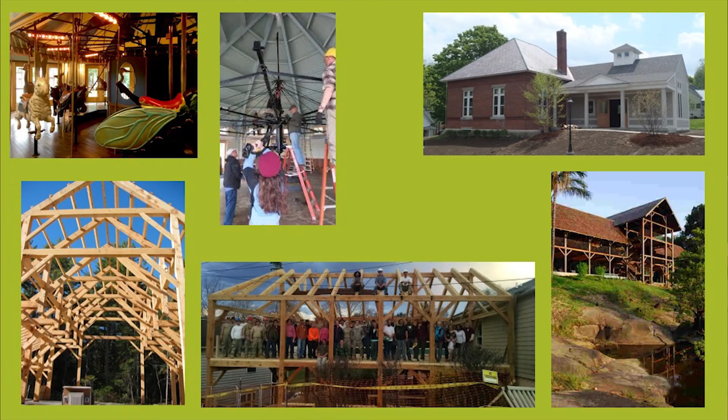This is actually my home that I don't live in anymore but still own, the first house I built in New Hampshire. And you could fit this house just in the living room of this house. So it's a wide range. Johannes had asked me about commercial structures as well, and I have done some over the years, mostly for institutions, a library addition, which I'll just mention briefly later, a carousel, which when they finally built, it's very hard to see, this timber framing is actually all steel, but they did use my design, but then built it in steel. It's still a very lovely building.

Projects with the Timber Framers Guild. This is one in Suriname that was a partnership with a local group. And Matthias, you were asking about the Virginia Military Institute. This was one of the projects we did for an addition to a women's shelter in Virginia.

So we do have quite a history in North America of timber framing, and this is right in the town where I'm living right now, Sandown Meeting House, from 1774, and here are some plans for something you can buy today, and a lot of people are very much interested in this kind of a style still.

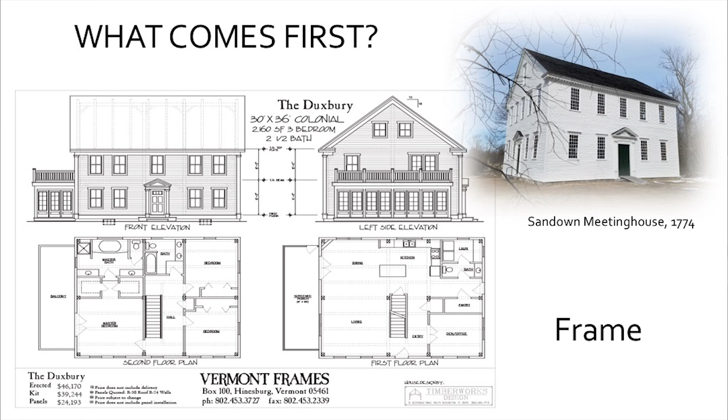So this is one timber framing tradition, and I guess in this style, it's very much set what the shape of the building will be, what the timber frame will be. In some ways, you start with that timber frame and put rooms in it. So the form is very set, and certainly this is a way that people have been living for a long time. When I started working with timber framers in design, this is most of how I was approached.

I am going to build a colonial. Can you show me where the rooms go? You know, so the frame is set and then put the rooms inside it. And I still do that. That's one approach to design. So here is, just took this out of a modern plan book off the internet. So you can pick that ready-made today, same kind of concept and frame you might see today.

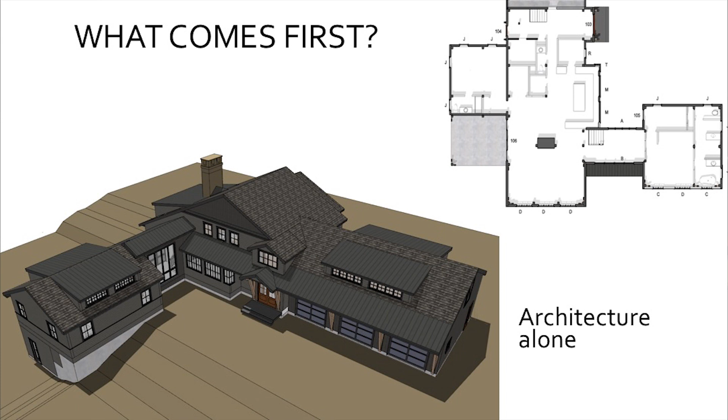Then, and I'm sure some of you get this, the house is completely designed, possibly very complicated. Can you put a timber frame in that, please? Has anyone been in that situation? And sometimes, oh, hi. Sometimes that works well and sometimes not so well. I have this one as an example. The design was very set, and then I was asked, can you put the frame in? Let's see if I have a view of this.

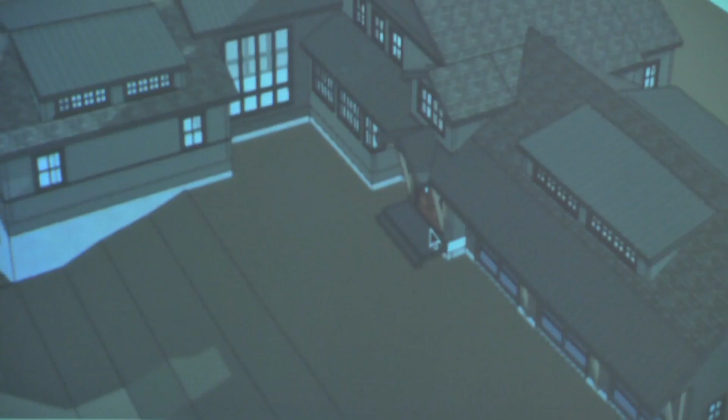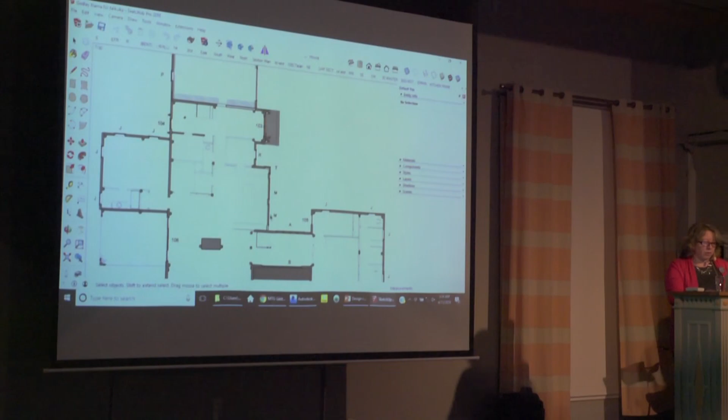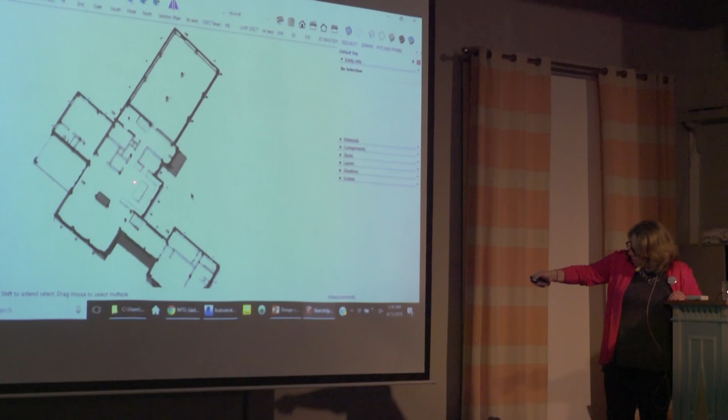So I did have a SketchUp drawing from the architect, and then I kind of redrew it. It was just a concept, so I redrew it, but I did take that and put the timber frame in. But we had a few spots, for instance, on this first floor, you can start to see the beginnings of a grid here with timbers going this way down here, and then another line of timbers, except we couldn't have a post right there or right there, or right there because there's a nice big door.

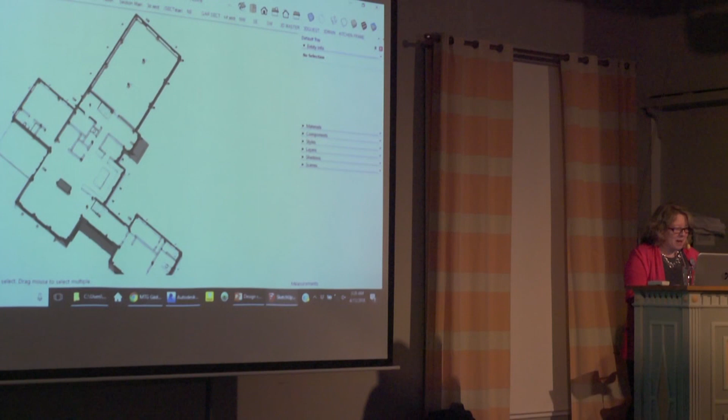So we design the frame and then we fix all the problems of... You're laughing because you've been in this same situation, right?

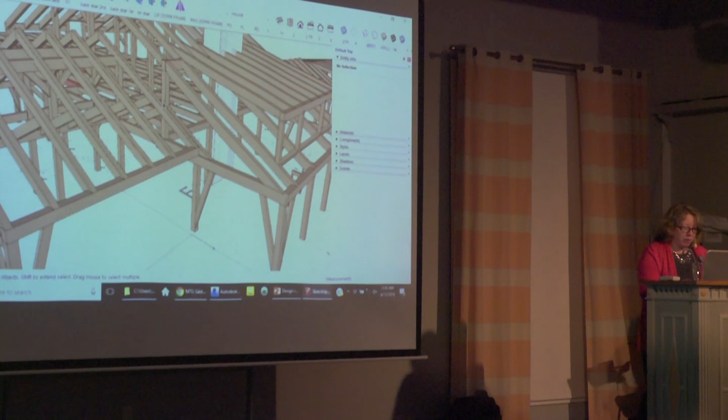So over here, we can't have a post coming down all the way here, so I create a truss up in the roof structure. A little hard to see there, but maybe you can see it right there. So we create this truss to stop this post. This is in an area where you might get 2 feet of snow on the roof. So I would rather design from the beginning to have all the loads go down to the floor, a much simpler concept. But these are the situations you find yourself in sometimes.

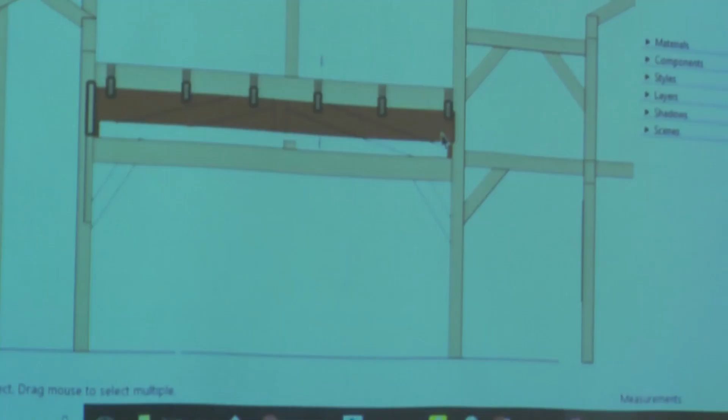Similar on the other side. Another post coming down with a lot more load and ended up putting in, we thought steel, then wood, a very large beam to take all the load of that so that the kitchen design stays proper. So I'm trying when I design to think about all things at the same time, which can get a little difficult, but as timber framers, you're always used to thinking in 3 dimensions in any case.

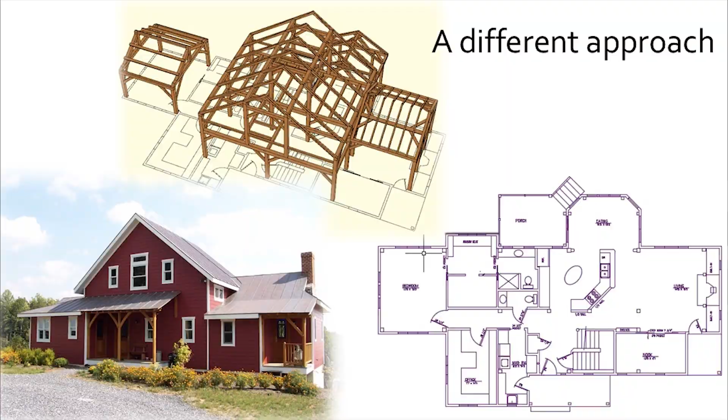So thinking about the floor plan, which most clients have the best understanding of, they can see this plan and the layout of where the rooms go, but always at the same time thinking how that is going to be in 3 dimensions. And to my own aesthetic, to end up with forms that are fairly simple, can be understood. When you walk up to the house, the main thing is happening in the middle, and other less important things are happening to the sides. And that's just how the plan is laid out too.

The main living space here, a smaller place to gather here and to eat here, a retreat for the parents, that's that frame there. And for this project, a lot of the pieces in between where you don't see the timber frame were just filled in with other kinds of structure. What I wanted to say about the plan, though, is going back to this kind of a plan.

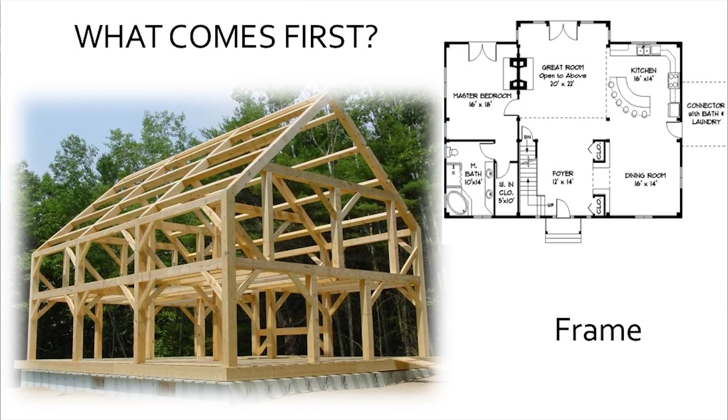This kind of a plan is very much a grid, or like a checkerboard or chessboard, 1 square, 1 square. So you make that grid and you say 1 square is your kitchen, 1 square your living room, or 2 squares, but everything goes by the grid and the squares. And what I've tried to develop is there's still a grid work, but it's more, I thank the gentleman to the side here, almost in the back, that's wearing a plaid shirt. I think it's the same in Swedish, right? Plaid, right?

And also right here, where you still have lines intersecting, but different spaces, because there's a different hierarchy of importance in the space, and where those things intersect then also become your main spaces. So I have a major line here, a minor line here of stairs, and a small little study or sleeping space. Similarly, major here for the sleeping space, and then a little minor in-between space for a closet, a resting area.

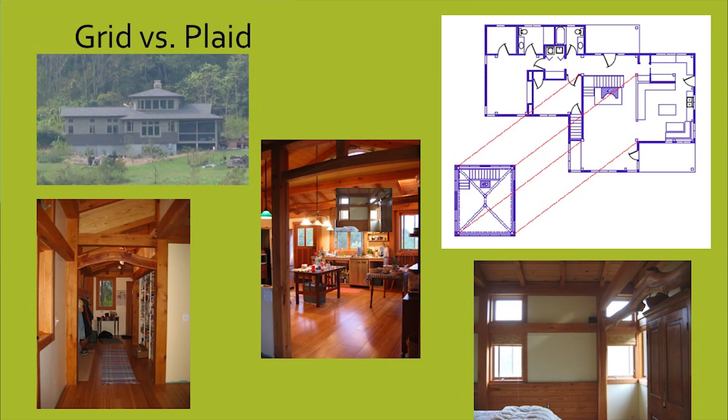So this idea of an interweaving or a plaid floor plan instead of a checkerboard floor plan. So there is another example where instead of a number of squares, you have a much smaller line here that is your access, your circulation between rooms, main space this way too, and another line going this way. That's not uncommon for architects, the way that a lot of architects would work, right? Creating these major and minor lines and paths.

But in timber framing, at least in North America, that was kind of a different approach, because there was, at least where I live in the northeast part of the United States, a long tradition of this more traditional square way of thinking. So just a project I did a number of years ago using this approach, and also trying to bring in a couple of spots the natural timbers, a little harder to see there, and in the bedroom here, to be a little bit of a reminder of the tree, of where the wood is coming from.

We were also talking in the car about timber braces, knee braces. These clients didn't really want to see the diagonal braces, and Rupert said, well, why are you doing a timber frame? But we came up with a different approach where all of the bracing is inside the wall, in an infill structure. And so we were able to avoid the diagonal braces, which they didn't want in the project.

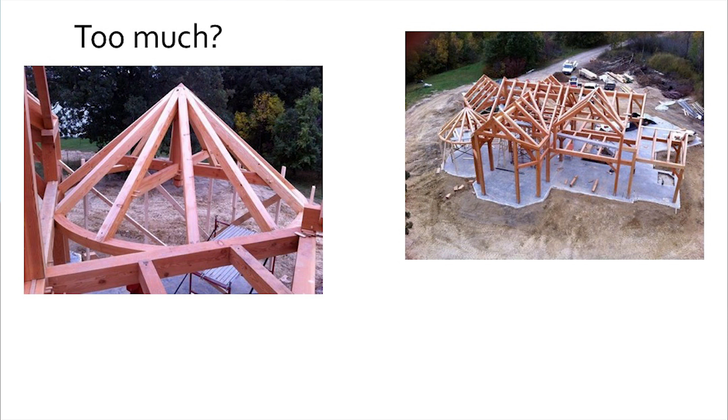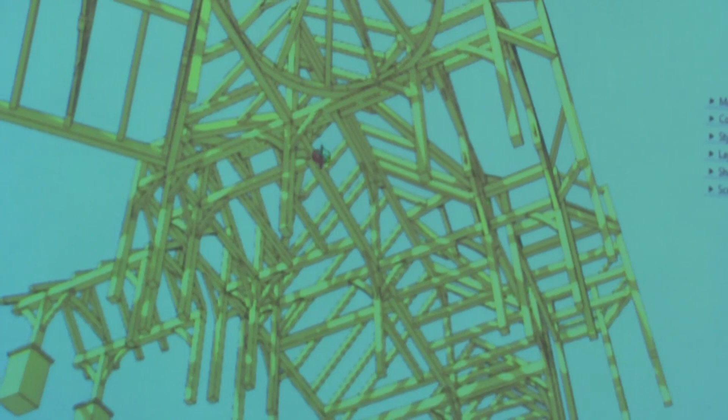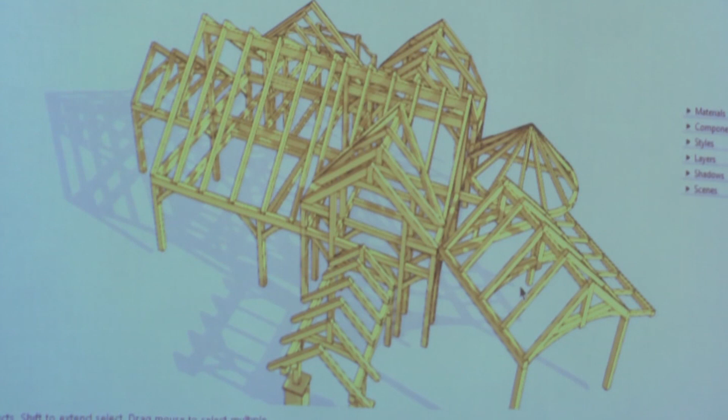I've done projects like this where every little space has its own roof, has its own special thing. And we get into a situation where the intersection, I think I have a better view of that. Again, the design was set, and then how do we put the timber frame in? I think in the end we worked it out so that everything kind of mixed, played well, but this was a design that was already designed. I don't know that I would have designed it this way, because to me, these frames almost seem like they're in a little bit of a battle. I'm not sure who won the war on that one.

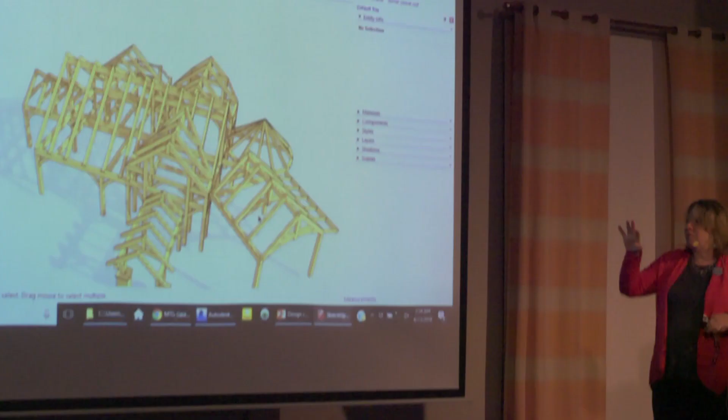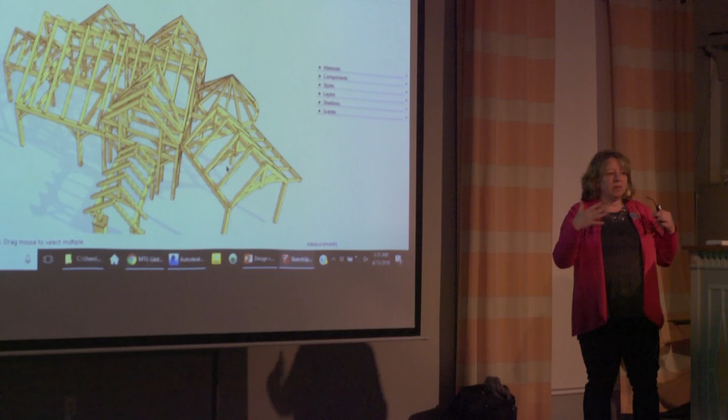But to me, I'm feeling a lack of harmony, even though each of the spaces probably has a very nice feel when you're in it. When you look at the total experience in the home, I think maybe too much of a clash, too much of an argument between these frames that are trying to get along.

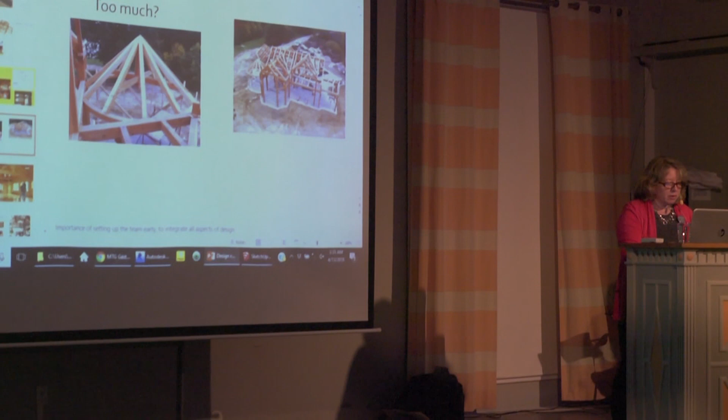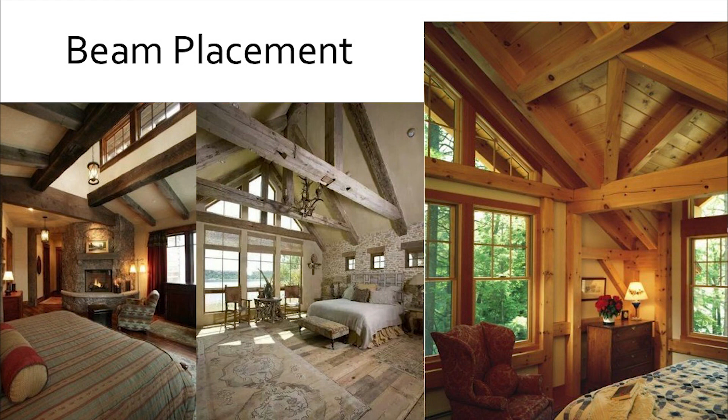So a couple of examples: this bed, I think it's centered nicely between these two very big, heavy trusses, but I would be a little uncomfortable laying in that bed, feeling like I was about to be sliced on either side. I did a project in years past, and the client wanted a hip roof to wrap in their bedroom, but it created a situation where there would be a diagonal beam directly across the bed, overhead. To me, that would be a very uncomfortable way to be sleeping.

I don't follow a lot of feng shui directly, but I think about those principles, and that to me was very bad for marital harmony, to have a beam directly across. Here's one. It's just to the side of the bed, and I thought this could be very nice. Very much smaller timber, of a height you could almost touch, so it's more friendly to you. It creates a very small little extra space there. This is a small room, but you almost feel like you have another little extra space in your room. This is an entirely different scale and has an entirely different effect.

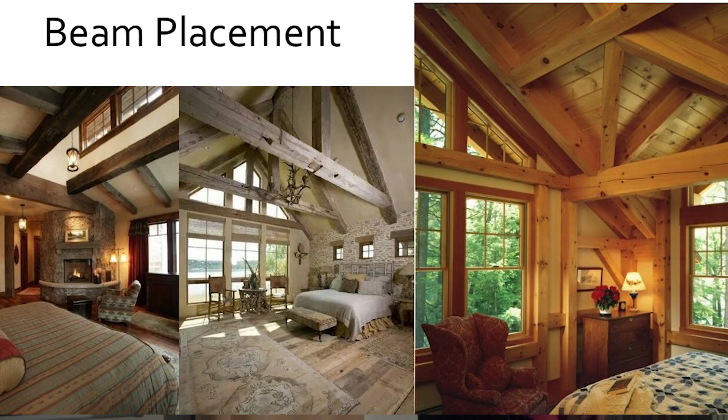This is another example where I like how the light is coming in, but maybe in the cross section drawing that looked better than in the room, where you can't really see the windows when you're laying in the bed. So that's why I showed some of the SketchUp drawings. I'm trying to model everything now in 3 dimensions. It can be a little deceiving about the size of a room, but it will show you what you can and can't see in a space.

So, just again about beam placement, I don't know that every room has to be symmetrical. It doesn't bother me that this is to one side, but the way the beam is placed makes it look like I can't tell whether this is supposed to hold up the beam or they're just fitting it in.

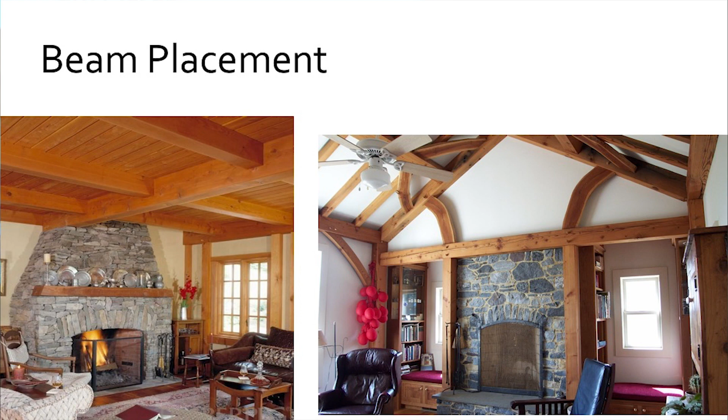Very heavy, and everything in the room kind of makes you feel weighted down, and again, you're sitting directly under this very heavy space. Just a little contrast, a lot of variation between larger pieces and then the smaller pieces.

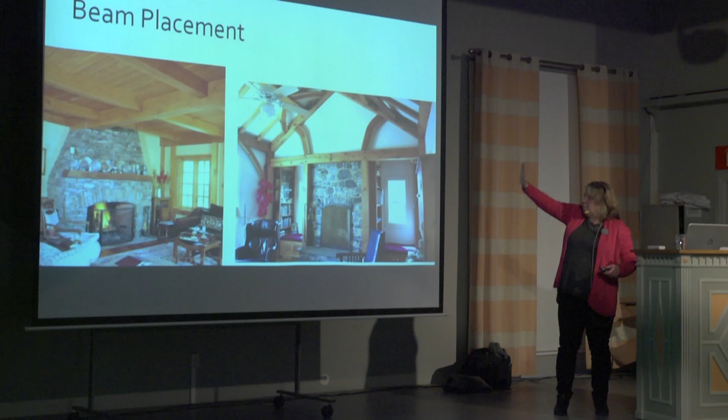And we also, in this project, because they wanted these extra window seats, we just brought the timber frame forward so you could see it, and then put that back, just extra framed part past the timber frame. So separation of spaces, again, this is a very typical condition, a design of timber frames, and how you would separate to put rooms within that space.

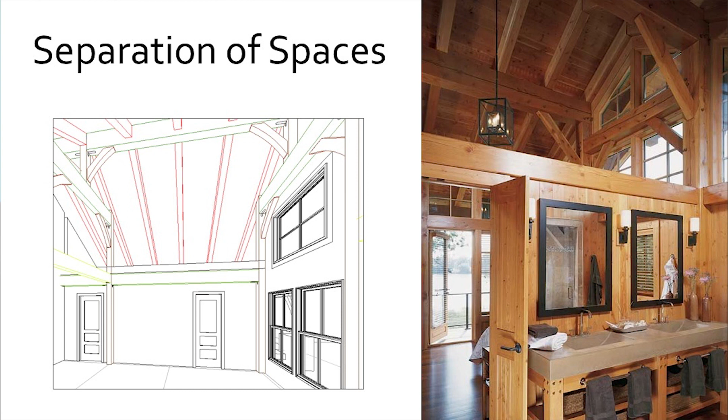This is a project I'm working on right now, and I've been experimenting with... here's the floor plan. We had a meeting live with the clients, but online for this one, and experimenting with showing right on the screen the spaces to see if they can understand. But the timber frame in this area, so large purlins coming across in the roof, all open to the roof, but how do you close off these spaces?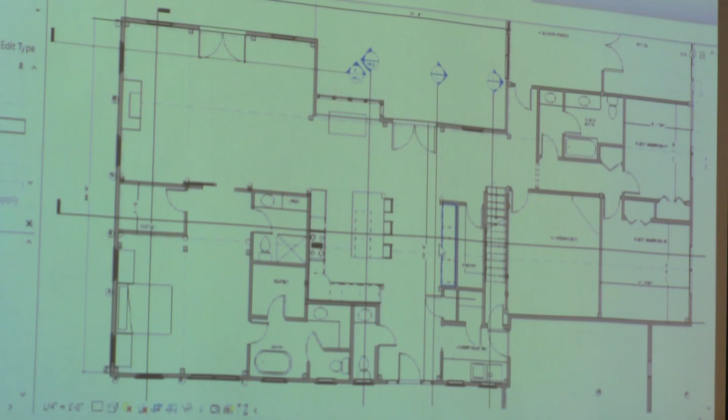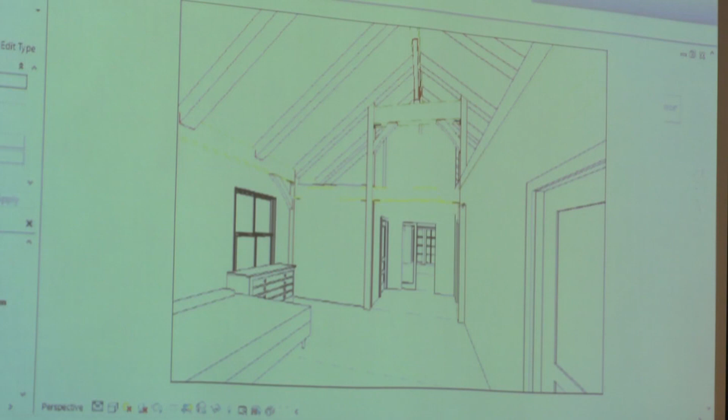In particular, everything follows the frame, but do the walls go all the way up to the roof, or do you stop at a certain point, kind of like in the previous slide? And so this is a very, very schematic stage. Are you able to see that from there? It's a little extra bright. So it's at a very schematic stage, but just to show, does this closet just come up to here?

And I actually wanted to just bring it all up. And again, the clients thought, well, the timber frame's so pretty, I want to see all of it. I think it's fine to me, but it kind of makes it look a little bit like this is a little phone booth, tucked in. So I would prefer to have that go all the way up, but we're still working on the design. And the same thing on this side, we have a bathroom, and do you want this space above?

So there we are looking towards it. There's the whole frame. Unless you have a ladder or a stair or some way to get up there, and some use for that, to my eye, it would be better just to cover it. And that also represents a lot of work in the timber framing, but I like that your eye can go past, but maybe it's, again, too much.

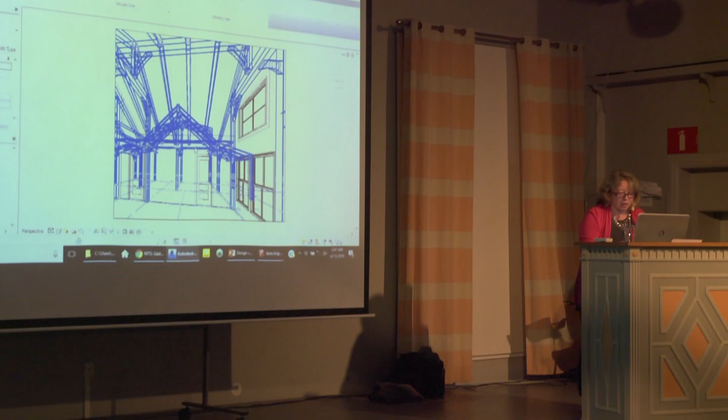It also does raise a good question, though, about placement of braces, where you place the walls, to one side of the beam or the other. If you have, in America, all by inches, 8-inch post, 6-inch beam, and it's all to the center, do you place the wall to the side of the post, to the side of the beam? There's no good answer, or in this case, actually, you can see the X-ray of the frame there. No braces, because we had a wall there. They just decided to remove the braces.

So here's a very similar condition where the wall stops, you see the timber frame past, but you can't really get to that space. It's just for your eye. I have a mixed feeling.

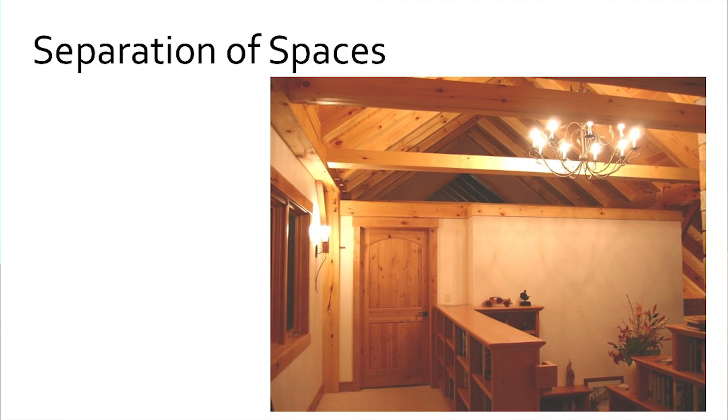This was another project, a similar kind of concept where you have the two main central purlins. We had a little office space, and this was kind of designed by the client. He came with a very developed design that he had produced himself, and he had this high dormer up here. So we decided in this case to make a little roof just for this room, so that from this room you could see up and towards that dormer. I think it worked out okay in the end.

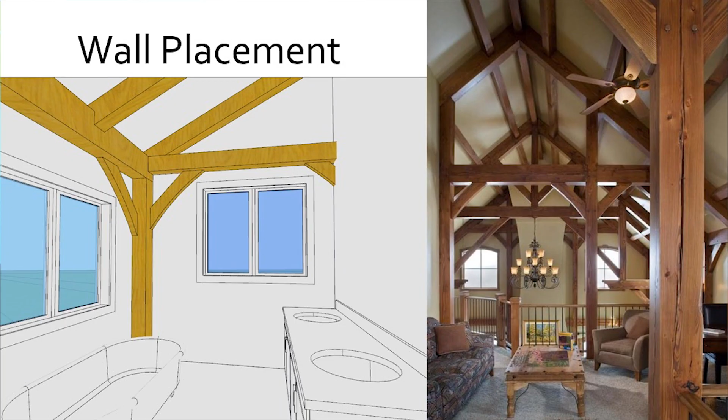Back to wall placement, here's an early study for this room. That to me is not good. That's the brace coming through from the other side. I don't mind a brace across a window, but that looks like I wasn't really paying attention. So when designing the frame, now I'm trying to have all of the architecture in place, even if it's very schematic like this. This tells enough. I don't need the detail, but it tells enough about a consideration that we might not have thought about.

Here's a good example of placing the wall by the post. In the floor plan, it probably looked very good, but here it looks very, very blank in relation to this side, and you can see that last purlin is just to one side of the wall, and maybe the answer is not in the timber frame.

Maybe this wall needs to have another level of detail or some wood cladding just to bring it more in harmony with the frame, but it looks very abrupt, like you had one thing happening and then all of a sudden something different there where that wall is. But to my thinking, that probably looked very proper in the floor plan, but when you see it in 3 dimensions, then maybe it didn't quite work out the way they thought.

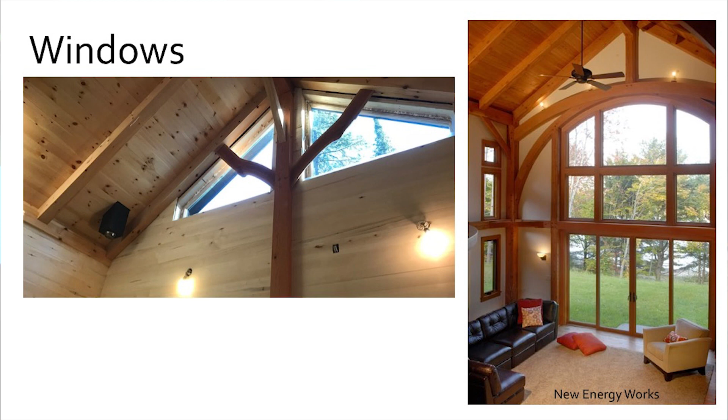I like the timbers across the windows. I think it's nice. This I thought also very nice harmony of the timber work with the windows, and you can see just very small here, the timbers going across the window trim.

To me, that brings to light that, at least in North America, most of the time, the enclosure is to the outside of the timber frame. You're seeing the whole timber frame. So if they're in a separate plane, they can be doing separate things. And I actually find it appealing when that looks well balanced, to have those two things working together, but they highlight the difference between the two.

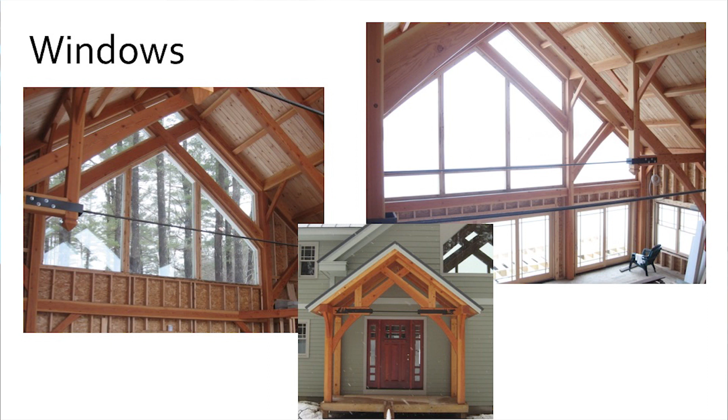And here's an example where actually the windows were designed to perfectly fit inside the timbers. That shape was a little bit of a theme. We even followed it onto the front porch there.

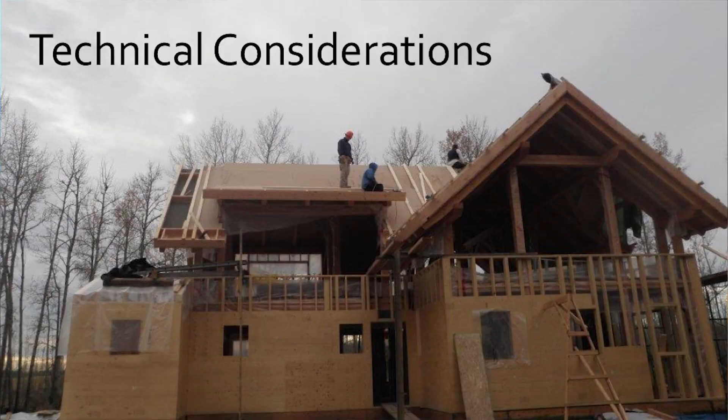So some technical considerations. There's a lot going on in this photograph. This project, they decided to do the enclosure wrap with conventional framing, and my understanding is that that's what most people are doing in Scandinavia. Is that correct? So both on the walls and then on the roof, you can start to see just on top boards, and then a layer of conventional framing, cellulose insulation. What might be very familiar to you.

I would say on the projects I work on, maybe 20% use this kind of enclosure, and a lot of times that's because it's easier for the people doing the work. They understand it. Maybe they're carpenters that are used to doing this kind of work, so it's very easy to tell the crew just to do it the regular way. But of course, if you have a whole structure inside, it's a bit redundant.

I'll talk about floor systems first, but on the walls, in North America, I would say what's most common are the structural insulated panels. And is everyone familiar with the SIPs, or the structural insulated panels? It's like a sandwich. So some kind of plywood or some sort of wood structural panel on the outside, a thick core of foam, different kinds of foam available, and then on the inside the same wood.

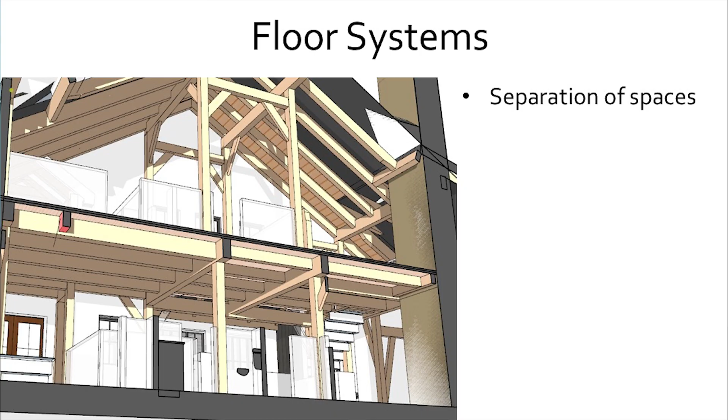So for floors, between, let's say, the first floor and the second floor, what does a floor need to do? For one, separate the space, so you don't fall to the first floor when you're on the second floor. It's inconvenient. So the very most basic version of that would be just boards right on top of the timbers. I do this on, I would say, about 1/3 of the projects I work on. Just put the floorboards down and we're done. It's the least expensive way to do it.

In this project, they actually have boards and then another product to take care of sound, just a little bit to have a sound barrier, and then a more finished floor. So it's 3 layers, but still no airspace, and all together maybe about 5 centimeters, and not very good to separate sound, not good at all to separate the vibration sound.

You hear every footstep. And in the case where you just do the boards, over time, it's kind of like it's always snowing in the house, because everything from upstairs is slowly coming downstairs, and I always think of it going into my soup on the stove. So I like to have a little bit more separation.

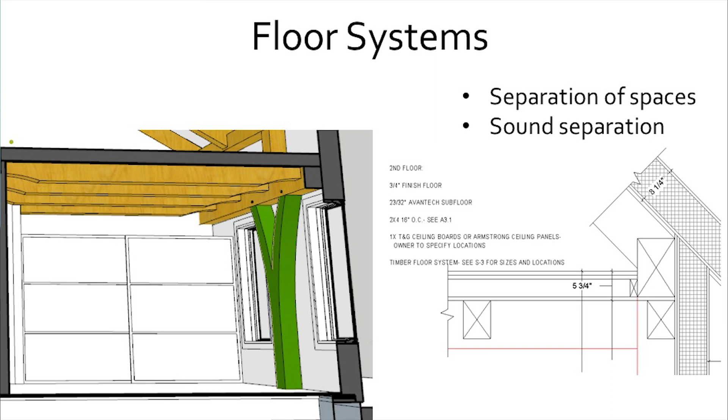So in the US, a 2x4, so about 3.5 inches, or a little less than 10 centimeters. And then a plywood subfloor, and then a finished floor. Could be any flooring on top of that.

So everything's working together. You have your timber structure that's doing the main work. The little, I call them baby floor joists, they're just creating a little bit of an air separation for sound, a place to put wiring, a place to put a little bit of insulation if you wanted to, both for sound and heat separation, and then you can do any finish on the floor above that. So this is, I would say, the most common thing I end up doing.

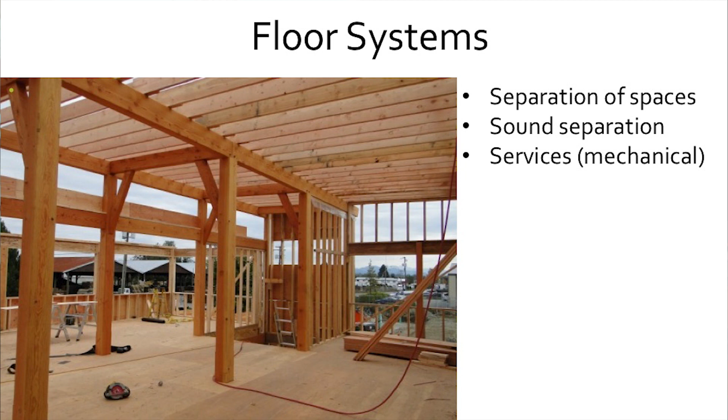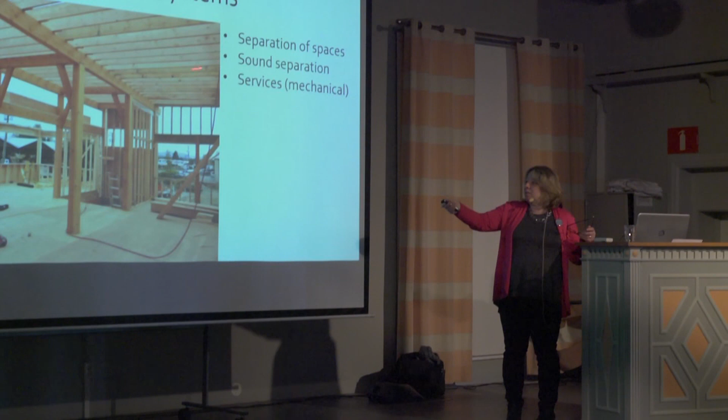And then about a quarter of the time, a full floor on top of the floor. So conventional framing on top of the timber framing of some kind. This gives you the advantage of the separation of space, the sound separation, but also now you can fit all of your mechanical systems. In the US, it's pretty common to have air heating and cooling, so the large ducts. I know that's less common in Europe and Scandinavia. So a space to do all of those things. Also can be redundant in structure, although you see here there's just a main beam and no secondary timbers here. So they're trying to balance between.

This is a system that's used at Bensonwood, where they've created a standoff. It's kind of the same concept where you have a large cavity for all those systems to go in, but with the smallest amount of material to create it. So this is much more like a commercial floating floor you'd see in a commercial building. I'm just starting to do some projects now that are using a version of this. I don't think they're licensing this exact system, but to create a system similar to this.

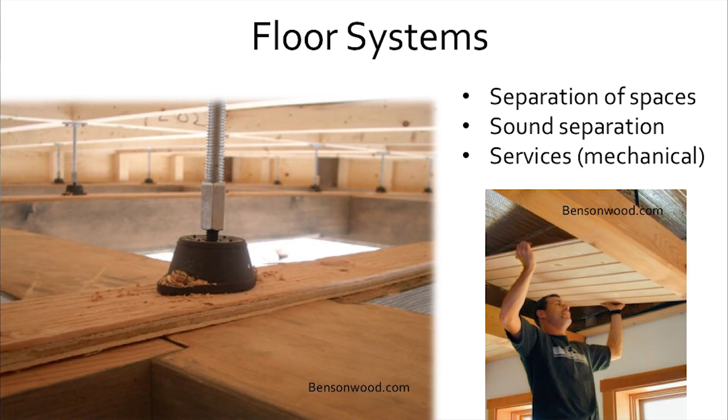The advantage here with the standoff is that you can go in both directions. You don't need to go through the floor framing to put any of your mechanicals in. This is meant to go to what? Yeah, it's a good question. You would still have on top some sort of a subfloor and finished floor, and down below these panels, which are removable. So I think that you would have a little bit less sound separation than if the ceiling was continuous. But in the floor above, they could also do a layer for sound attenuation.

Remind me what time I'm supposed to go until. Half an hour. Perfect.

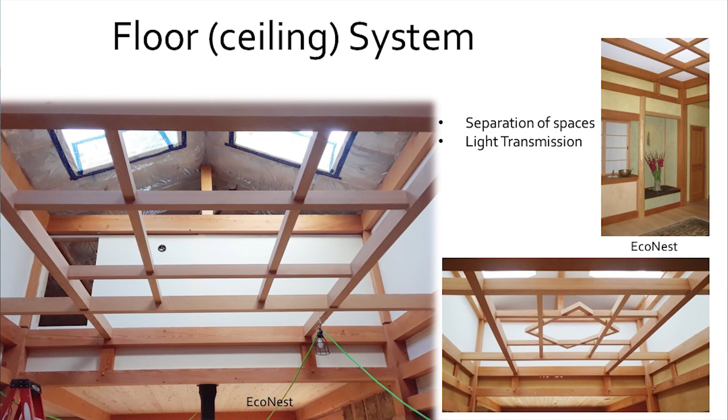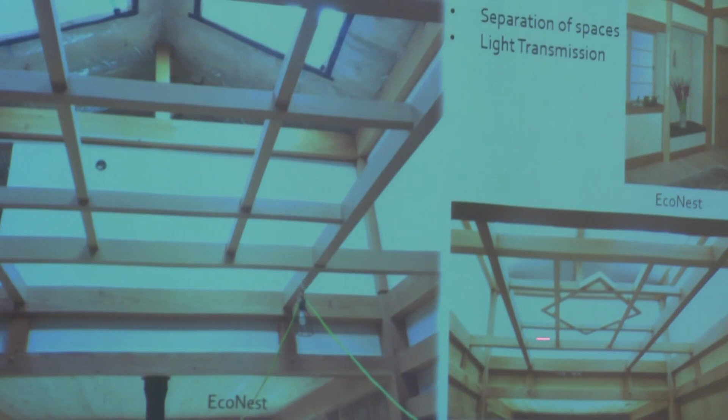This is one that I thought was very interesting. I saw this on EcoNest, Robert Laporte's Facebook page two days ago. They have a ceiling system that is going all the way up to the roof. So as I can understand from this picture, there's no room up above that living room. That's just empty for the light to come down. And then they do like a rice paper ceiling over this. So that would be the effect in the end, a very diffuse light coming in from above. And then he will also install lighting in there, so at night you can get the same effect coming down.

I find that very, very beautiful. It does require you to have this very empty space up above, so I'm not sure about that. And I'm also wondering, he must have a plan for how you get and clean the top of that paper over time, or maybe you're supposed to replace it every year. I'm just seeing this now, and I have questions I want to know.

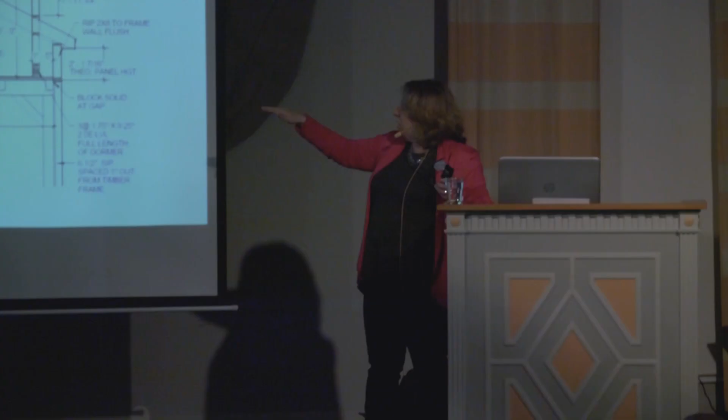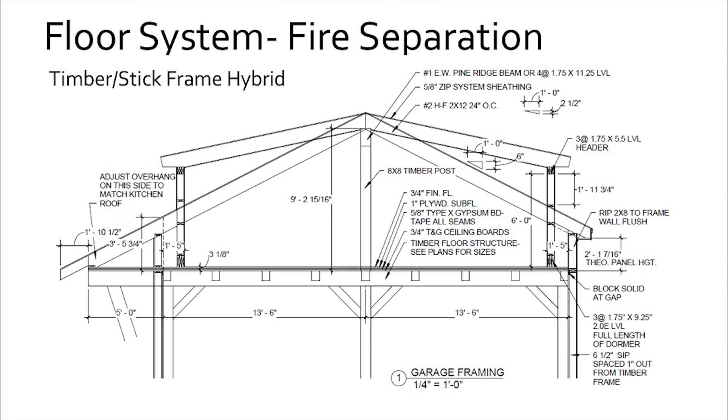But the interesting thing is that the boards are only 3/4 inch, but they're spanning a meter across, so that's not quite the span, and we're using the plywood above, so we're almost creating a little structural panel in the sandwich, in the build-up there. No space for mechanicals, so this is a space that's secondary to be finished later, and they'll just figure out how to do that at some other time.

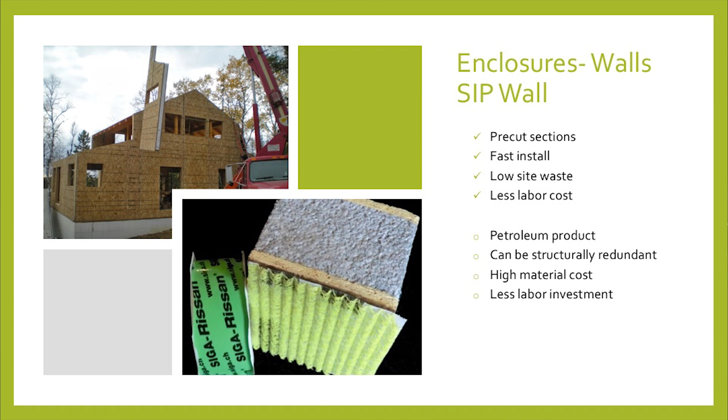I say down here, these are the positives, possible negatives, less labor investment. So if it's coming from somewhere else, it's less work for your crew or for you, less work locally. So that's a balance between, for some people, the pressure of getting something up quickly. There might be additional costs in having it take 3 weeks or more to put the outside of the building on. This might be a better choice.

And for some places, you lose the opportunity to pay your workers to do that work. Also, for an owner builder who's doing something by themselves, where their labor is free and all their friends' labor is free, it's a missed opportunity, and this would be much more expensive. It can be a higher cost for the material up front. A lot of the foams are a petroleum product, so that can be a concern.

For me, I'm in the middle, because you're using these kind of resources, but you're using them to lower the amount of energy that you're going to use in the home. And also, at least you're hoping that this will last on the outside of the home for a fairly long time. So the investment in using those resources, I'm okay with, I'm comfortable with.

To have a foam coffee cup, which you use for a minute and throw out, it seems like a bad use of that material. This, to me, is a better use of the material, but I know some people would prefer not to use a petroleum product at all, so that could be an issue.

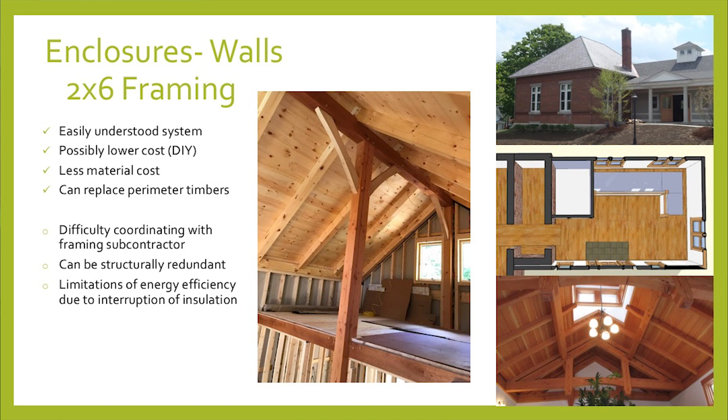This project, this is the addition to a library, just a very small space. This is the main, also very small library, and eventually they'll add to this side another main large library building. So this is just the first step to connect, here in the floor plan, the older library here, the brick building. Here it's really just an entryway, a ramp up to the other space, a small bathroom here, stairs down to a new basement, and just an entry, and eventually these windows will turn into a door.

It seemed like a lot going on to do a full timber frame with posts coming down and beams and braces in the way. So we just did a timber frame roof on top of conventionally framed walls. So that's another way to marry the two, just to have all that roof structure sitting on top.

I guess we're going to have a panel on this later, so I don't know that I'll speak on this so much, but a few different companies and individuals I've worked with are experimenting with other more high-performance enclosure systems, trying to get, in some cases, the framing as light and as minimal as possible, but maybe a deeper space for getting closer to the passive house standards.

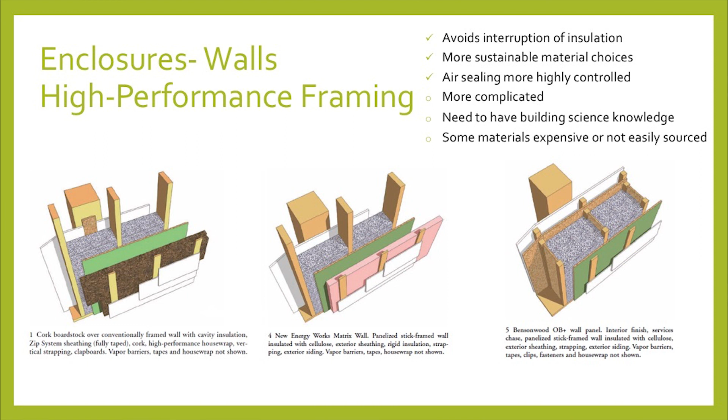And you can see on all of these a lot of pieces, a lot of components. The plus would be, when done right, you can get up to a passive house type standard, very high insulation value, possibly quite good use of ecological materials, and just a lower carbon footprint.

But to some people this can be very complicated, hard to control if they're not familiar with all the systems and all the components, and confusing for the carpenters on site if they don't have experience with this. So it definitely requires a lot more attention, probably worthwhile attention, but I'm just seeing these options now in use on projects I'm working on.

And also some alternatives to the foam infill on SIPs. A graphite, who knew? Adding graphite makes it better insulating, lighter, and not as expensive. It's all good. A straw panel, which is interesting. Instead of building straw bales piece on piece, someone's working with creating a panel.

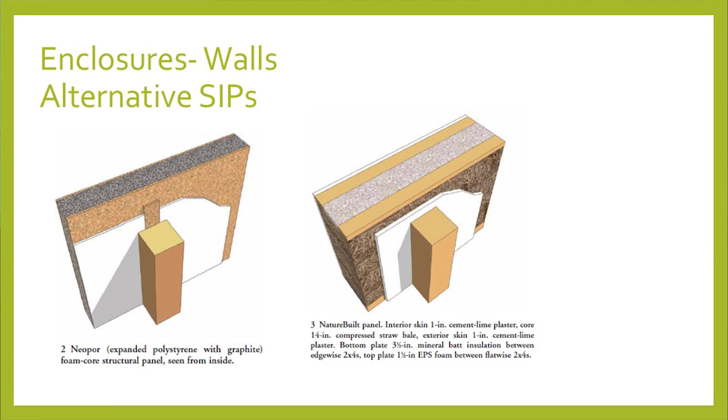For foundations here, typically are the buildings just on a slab with no basement, or would you have a basement underneath? No basement? Both. Okay. In Denmark, no basement, you're saying. Too wet, yes. Yeah, so you dig down 6 inches and you have the ocean, right?

So certainly in the colder part of the United States, a basement is typical because where I live, you need to go down 1.5 meters just to be below the frost depth. And so as long as you've gone that far, you might as well go all the way and have space down there. So the question is really in the timber frame. I'm sorry, that's a little hard to read.

There's your timber post. Is it going to be able to sit right evenly on the foundation, which pushes the wall perhaps to the outside, or will the wall all be even with the foundation and push the timber frame to the inside? Also, if you have a heavy snow load, you have a lot of load coming down to the foundation wall.

Conventional construction in the US, you can use a very minimal amount of reinforcing or steel in the foundation, but when you have a point load like that, where you might have 5 or 8 or 10,000 kilograms of weight coming down in one spot, you need a little more attention to the reinforcing in the foundation because of those point loads. So how the timber frame sits on the exterior walls is a consideration.

Here we have a good amount of insulation to the outside of the wall and a structural insulated panel that also goes to the outside of the frame, and because of the thickness, they almost create a continuous line here. The insulated panel is suspended over the foundation, just with 1 foot on and 1 foot off, but because it's fastened back to the timber frame, it can be supported that way.

So in this case, these walls are not considered to be structural. The timber post, which is right there, is creating the structure. You can see here what looks like a little bit of hardware, and that's connecting the post back to the basement post, all in a line. And another piece here, you can see just barely there, a strap.

And in that moment, some of the timbers in the building were just shattered from the force of a post pushing up on a timber or something else pushing down, or the shearing forces. And it turned out, when we went down below to investigate, that some of these straps to hold the timber post to the foundation were never installed. So the building was just very nicely sitting there until a wind came along and moved it very, very quickly.

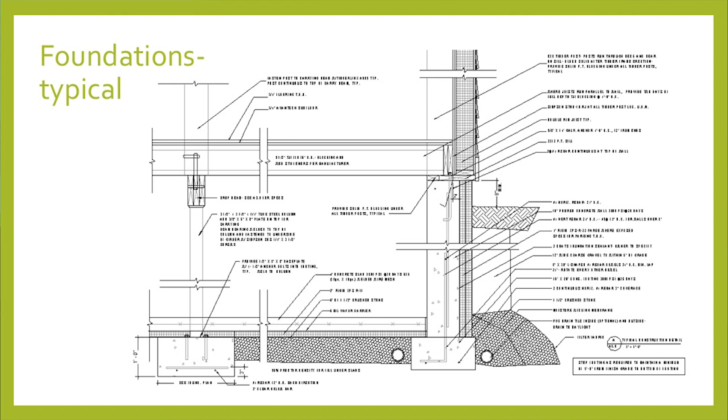And so possibly the builder that was supposed to install those connections was at fault, but you know how these things go when there's a problem. Everyone is considered to be at fault, and so the timber framers fix the problem at their own expense to avoid a bigger problem. But it's very, very important to have those connections back to the foundation. You have a heavy building, and in an earthquake or an extreme wind condition, that can feel like no weight at all.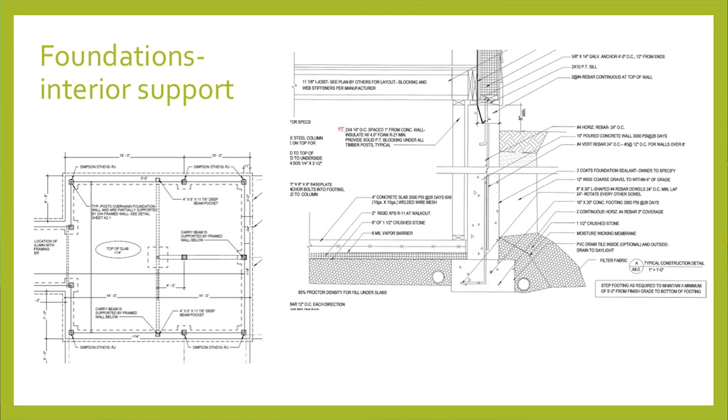So here, I'm going to skip through because I think it's very hard for you to see these. The timber post is to the inside, so we've actually just built a separate wall to the inside. And so because we're doing this, trying to make all the pieces work together, that becomes the insulation for the foundation to the inside of the concrete wall instead of to the outside of the concrete wall. So the timber actually sits just a little bit on the concrete and almost independently on the inside of the building.

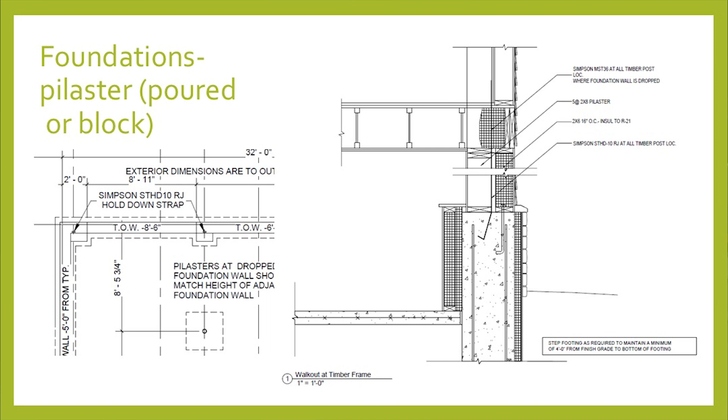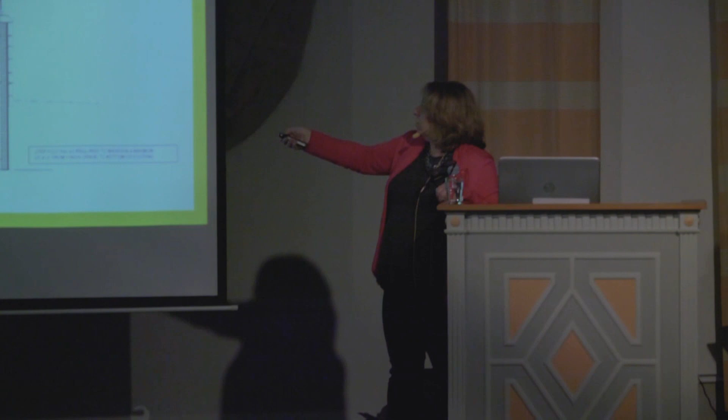And another version of that would be to just in those locations, like right there, to pour an extra foundation or to put up some kind of masonry, an extra support just for your timber posts. So there, a steel column in the middle of the building. So at those locations, you have direct support to the floor.

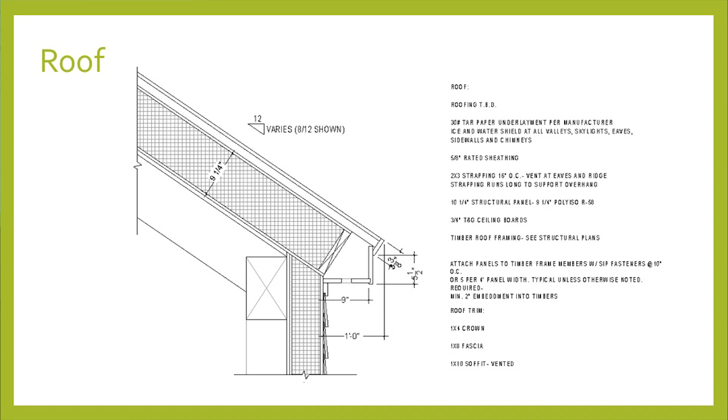For roofs, there's a good schematic of those panels all coming in one sandwich, just like the walls. And then over top, maybe half the time I see that done to create another airspace for ventilation, and also to allow the roof to stay cold on top of the panels, to avoid, I don't know how you would call it here, ice damming. You know what I mean? So ice buildup on the roof as it melts water on the roof and then refreezes.

But I'm doing a number of projects like this too, where the timber frame would stop, let's say right there, and just conventional manufactured trusses on top for a roof, or this kind of situation where the timber frame stops there and then just conventional rafters on top. And I think that can look fine in a building.

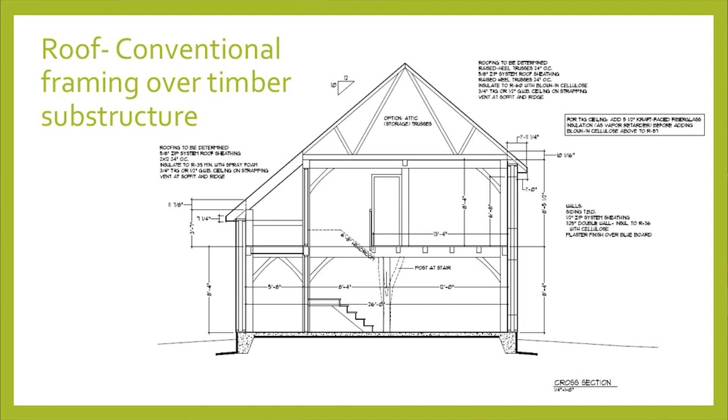This project, this is Danish style here, no basement. And we're doing what we call Larson trusses. I guess that's after the name of the person who invented them. Just a very light double wall, about 30 centimeters thick; instead of building two walls separately, you build that double wall in a panel with just small connectors, and that all goes up as a piece. And I've done just a few of those over the years.

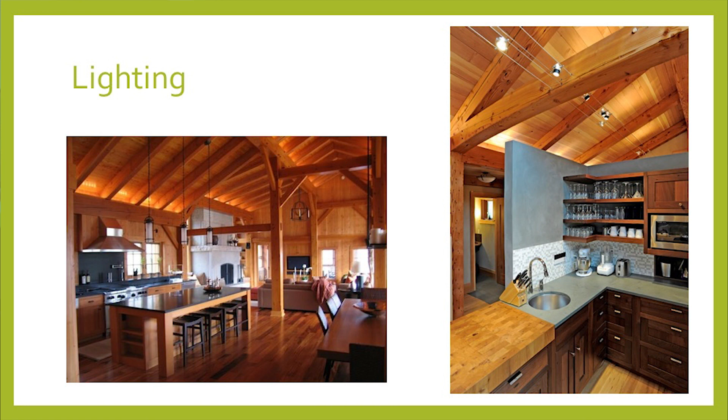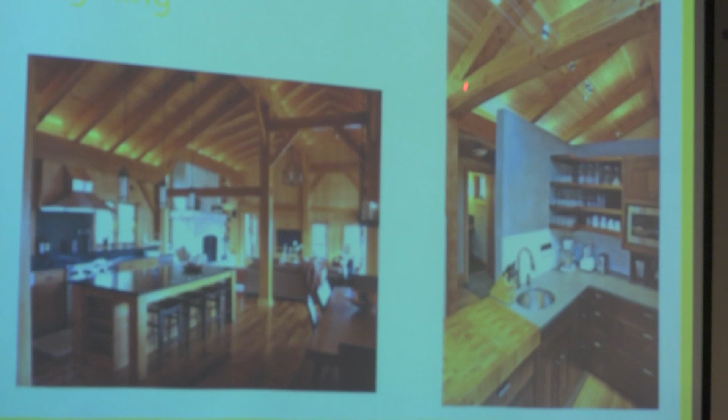Just a couple more things. I thought maybe lighting, definitely a consideration. I really like this kind of highlighting of the timber frame here. Now with LED lighting, there are so many different options. It was very hard before to find good options to light the frame, also because you don't have a lot of walls, you don't have a place to put the lighting. Here you don't necessarily want to put the lights on the ceiling, but the cable lighting, which I first learned about from IKEA, so you must have it all over Sweden. I like the mix here. The lighting does its job and the timbers do their job, and they kind of play nicely together.

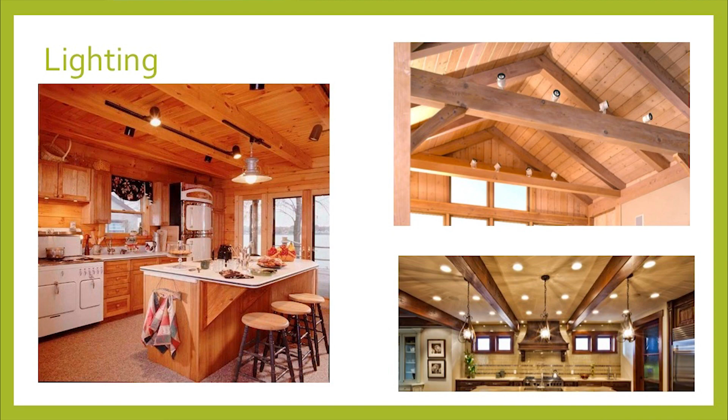To my eye, I always think this looks like birds up on the telephone wires. Visually, it looks like maybe you didn't think about it in advance. Same here, well, that's a lot going on. But it is nice if you do one of those built-up floors over top of the timbers, then you do have a place for recessed lighting and for your wiring, maybe a better layout than what you see there, but that can be a good solution.

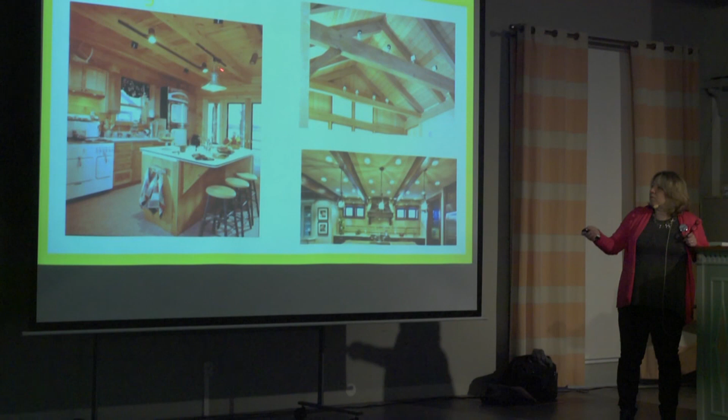Again, I don't mind putting lighting on the timbers. To me, it looks a little jumbled, a little like it wasn't all integrated together there. So I think that's about right. So we have a little bit of time just for questions and further thoughts.